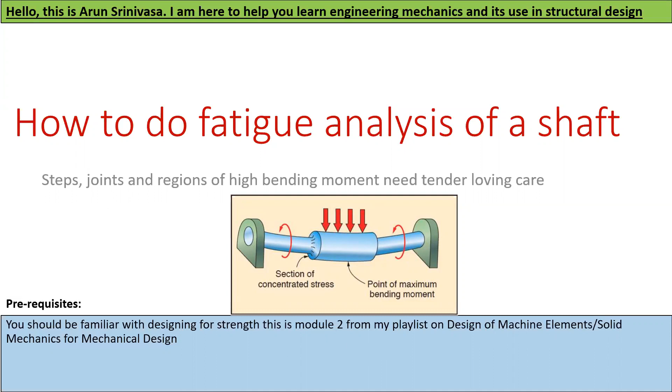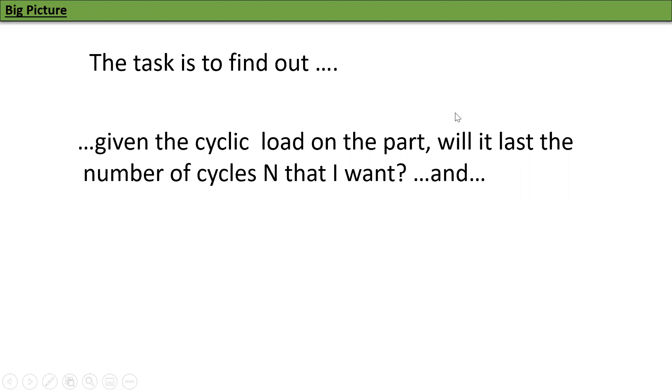Okay, so what's our task here? The task is to find out, given the cyclic load on a part, will it last the number of cycles n that I want? And what is the factor of safety? This is our task. This is the big picture. This is what I want to know.

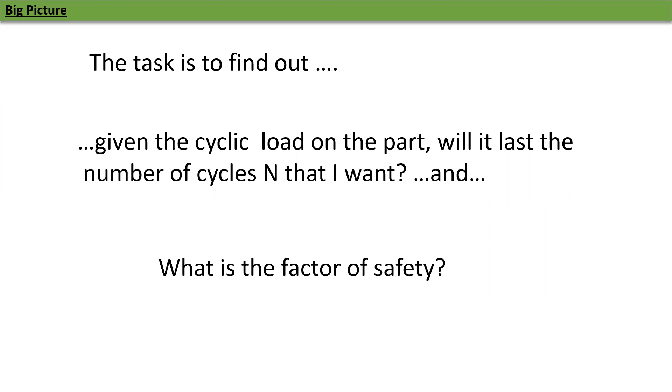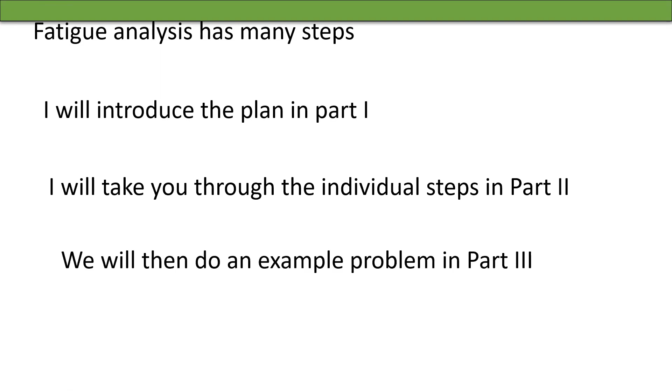Fatigue analysis has many steps. This is somewhat complicated. I will introduce the plan in part 1. I will take you through the individual steps in part 2. And then we will do an example problem in part 3. So there's a lot of parts, so we will do one at a time. Part 1 is what I'm going to talk about now, just the plan.

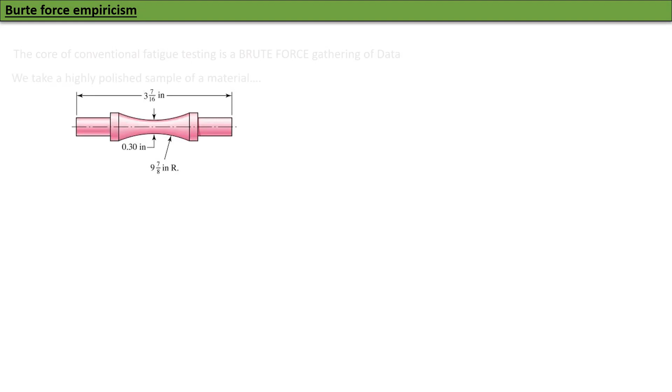So starting point is brute force empiricism. The core of conventional fatigue testing is brute force gathering of data. So we gather a lot of data by taking a highly polished sample of a material, and that is called the R.R. Moore test specimen. Don't ask why the dimensions are like that. That is the standard.

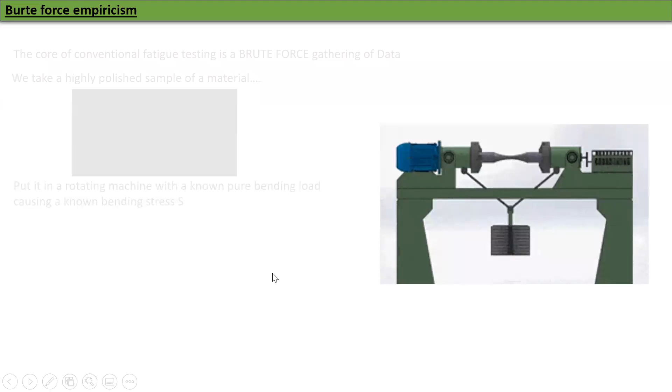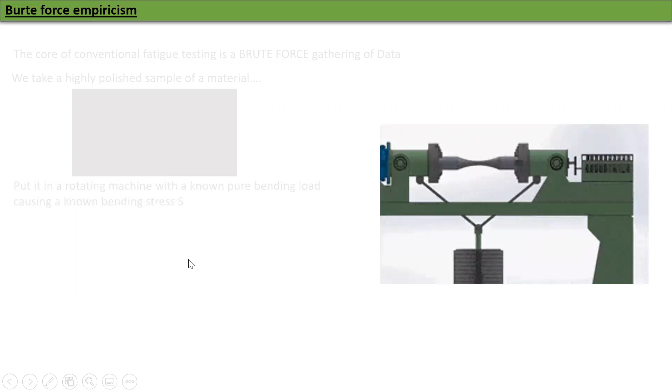Put it in a rotating machine with a known pure bending load causing a known bending stress. So there's the rotation machine. You can see there's the load on this, and it will spin and spin until it fails. You'll see it fails abruptly and you'll get a sudden fracture. So you spin it and it fails. This is the R.R. Moore testing specimen. Spin it until failure, so it's as simple as that.

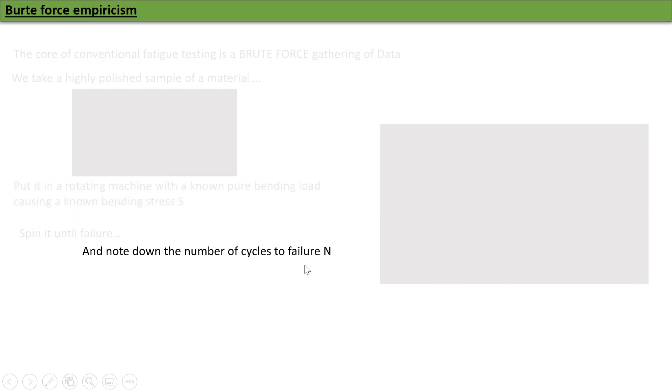Nowadays, people also use push pull and types like that, but typically this is what is done. And then you find out how many cycles to failure you had. This is the basic setup. Go on testing.

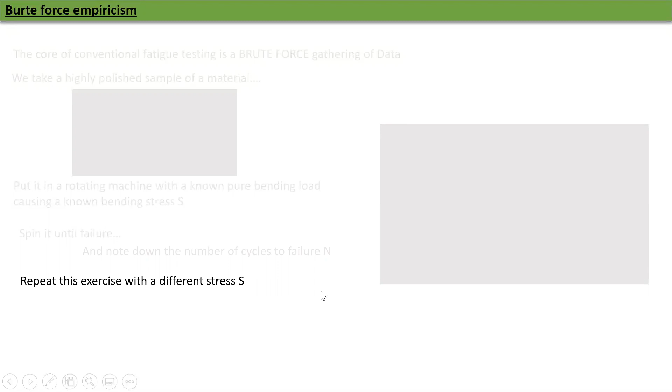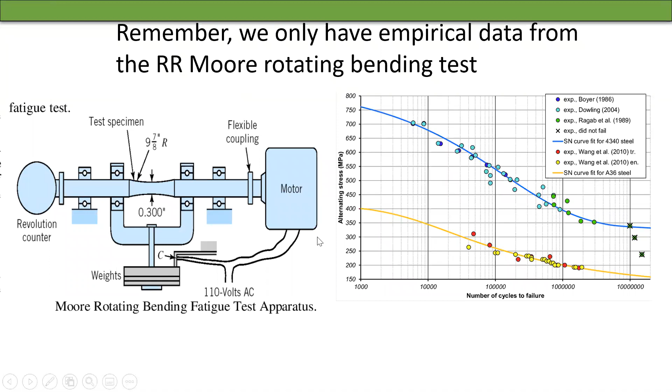Okay, so now apply a different stress, repeat this, and you will get what is called a SN diagram. So typically, this is what it looks like. I will get a SN curve. If you want to know how many cycles you have to take, you can say, okay, if I want to take 10,000 cycles, I have to apply...

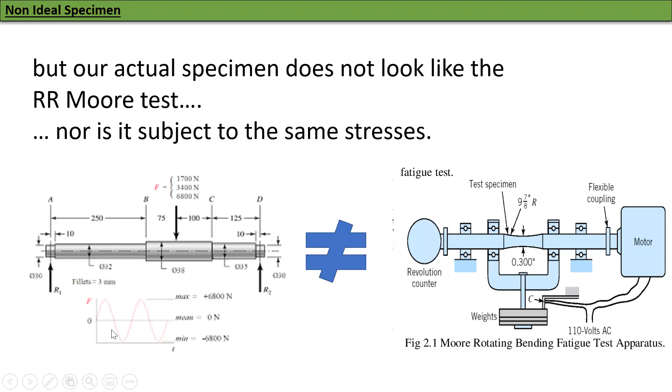But our actual specimen does not look like the R.R. Moore test, nor is it subject to the same stresses. My actual test specimen looks like this. R.R. Moore test looks like that. They're not the same. So what am I going to do?

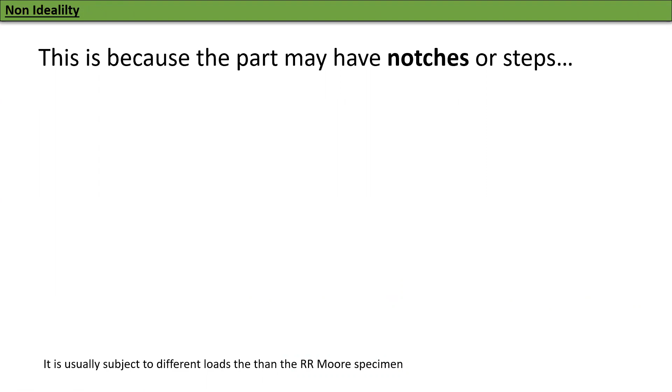The reason for a non-ideality is because my load may be different. The parts may have notches or steps. The part has different surface than test specimen, may be bigger size than the test specimen. It may be operated at a different temperature than most.

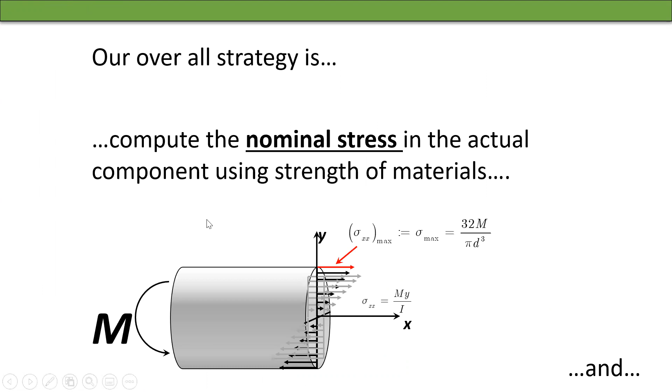Our overall strategy is compute the nominal stress in the actual component using strength of materials, 32 M over pi d cubed, and adjust the stress so as to find what would be the R.R. Moore test which has the same life.

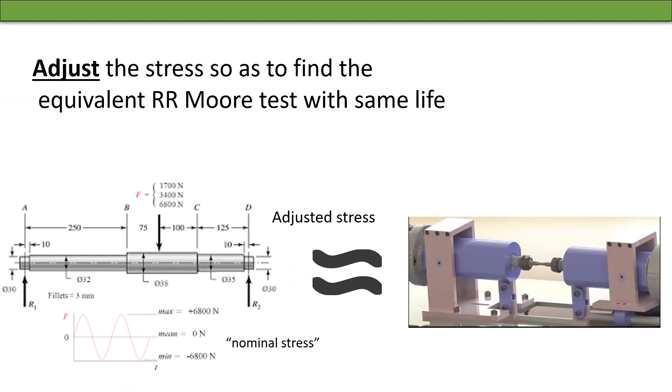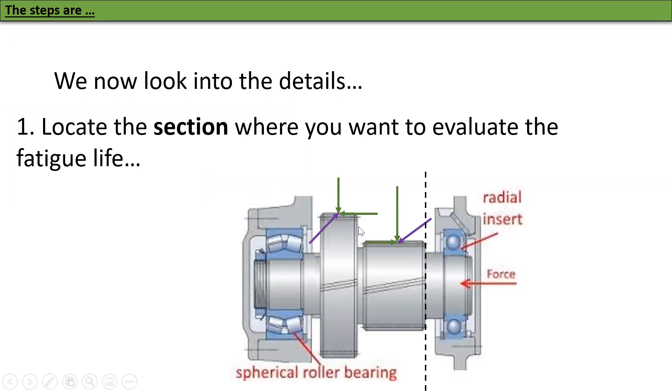So we now look into the details. This is what we are going to do. Locate the section where you want to evaluate the fatigue life. So I have a shaft. I know how to do this part. We have done this. Then cut the shaft at that section.

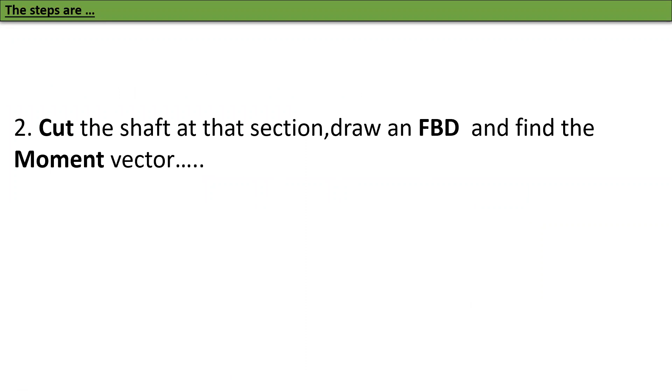Draw a free body diagram and find the moment vector. We have done this before. There you go: Mx, My, Mz. Find the total torque and the total bending moment so that we know My squared plus Mz squared. Find the alternating nominal stress.

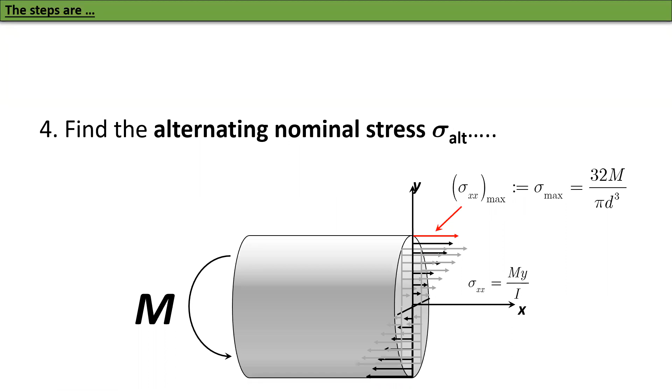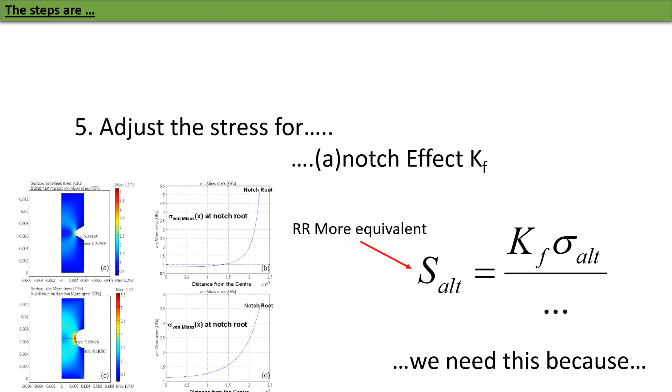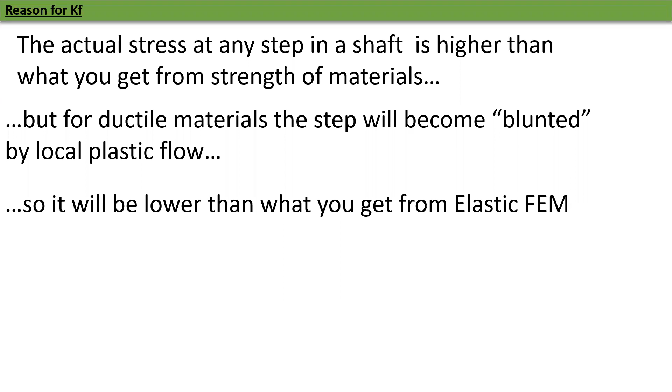Adjust the stress for notch effect, so Kf times whatever alternating bending stress you want. The reason for Kf is that the actual stress at any step in the shaft is higher than what you get from the strength of materials. But for ductile materials, the step will become blunted by local plastic flow, so it will be lower than what you get for elastic FEM. So you have to adjust for ductile materials. Kf contains all this information.

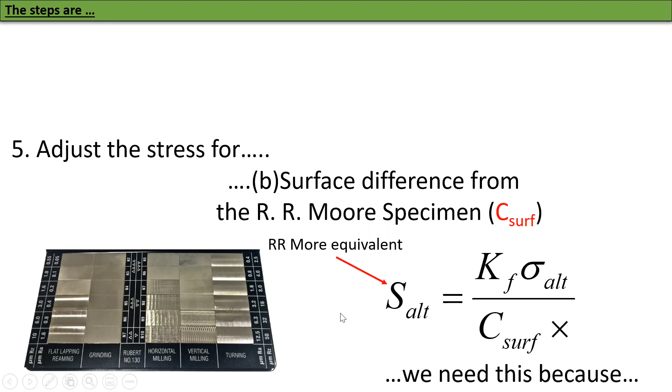The second thing you have to adjust for is surface difference from RR Moore. Surface difference goes in the denominator, C surf. We need this because the RR Moore specimen is polished with very few scratches, but your component may be milled, turned, or ground with many scratches.

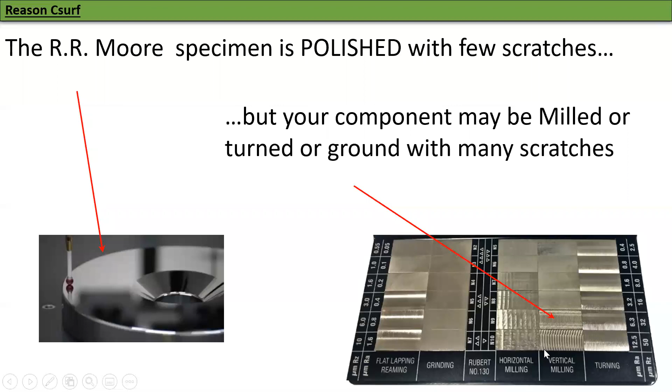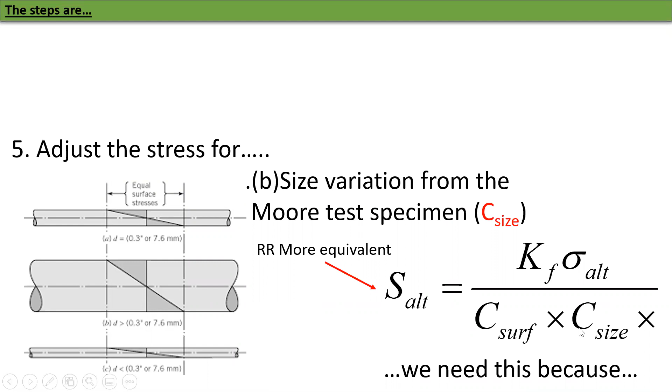You have to adjust the specimen for size variation from the RR Moore test, so that is called C size. We need it because the RR Moore specimen has a fixed standard size. If your component is not comparable in size, then the volume of material under high stress will be different. For a bigger specimen, there is greater chance of a defect in the high stress region, so life is shorter.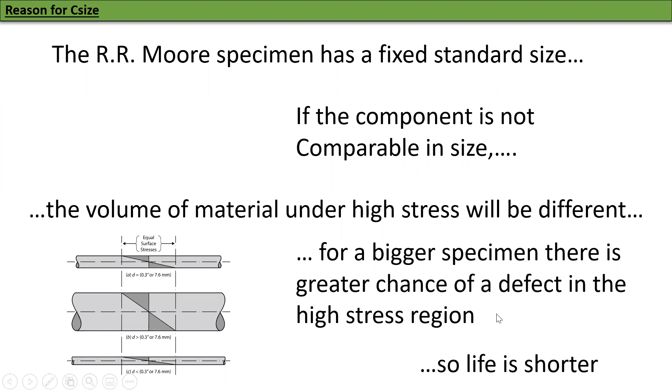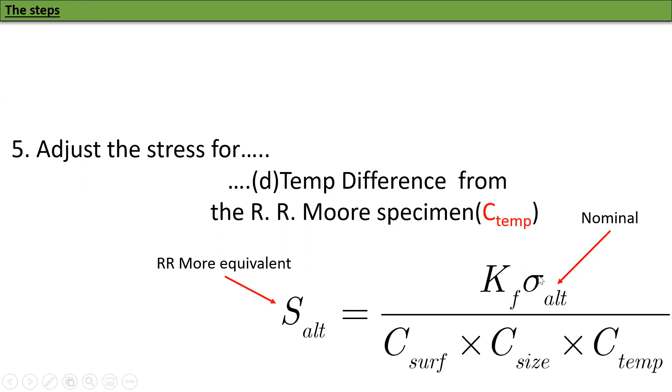So we have to adjust the stress for temperature difference from the RR Moore specimen. I compute the stress, multiply it by this factor and divide by the other factors so that I can get the expected life of the component.

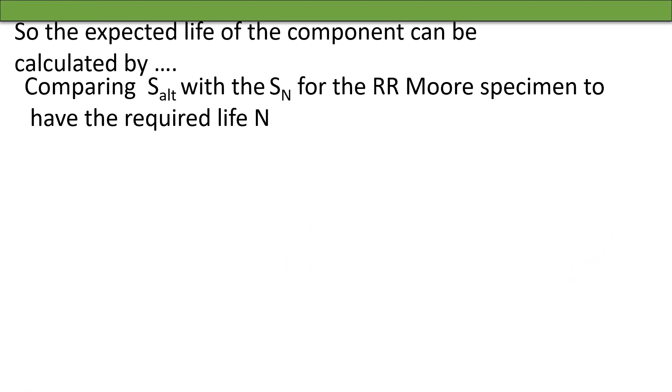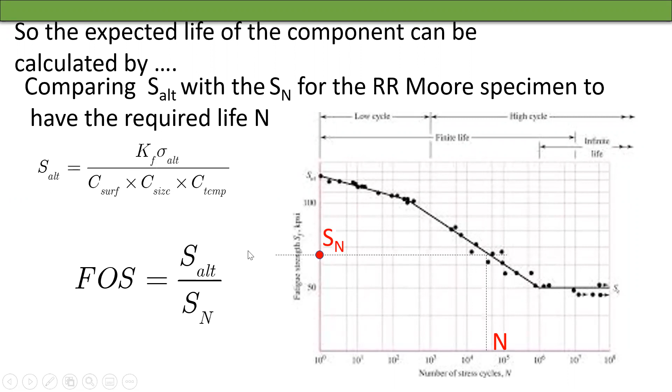Comparing S alt with Sn for the RR Moore test, to have the required life n. So S alt is this. Notice the three factors in the denominator and the one factor in the numerator. Kf is the fatigue stress concentration factor. You look at S alt, draw this line, and find out Sn. So the factor of safety is whatever stress I computed divided by the Sn.

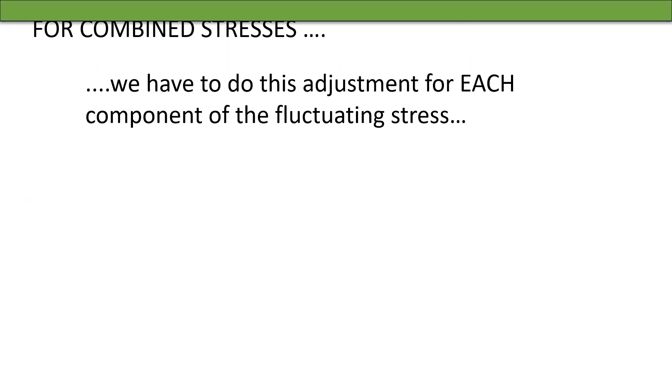So I went through this kind of fast, but we will see how this goes. For combined stresses, we have to do this adjustment for each component of the fluctuating stress and combine it into one equivalent value to use as the RR Moore stress, S alt. The planning is done, super sweet.

Okay, now test your understanding. What are the conditions under which the RR Moore test is conducted? Describe in your own words the reasons why the actual specimen will not have the same life as the RR Moore specimen. Describe the 5 steps and the sub-steps for calculating the equivalent stress. Describe in your own words why Kf, C surf, C size and C temp are needed, and explain why they are needed. If you can do all of this, you understood this part.

I went over this kind of fast because there is nothing other than description here. We will dive into the details as we go along, but just read through this so that you understand what are the steps involved, and get the core idea that we take an actual specimen, we convert the stress in the actual specimen to equivalent stress so that we can use the RR Moore test data. This is not exactly how Shigley does it, but this is how it will make sense. Shigley does it in a slightly different way. Please take a look at how they do it and compare it with what I have spoken. Thank you.